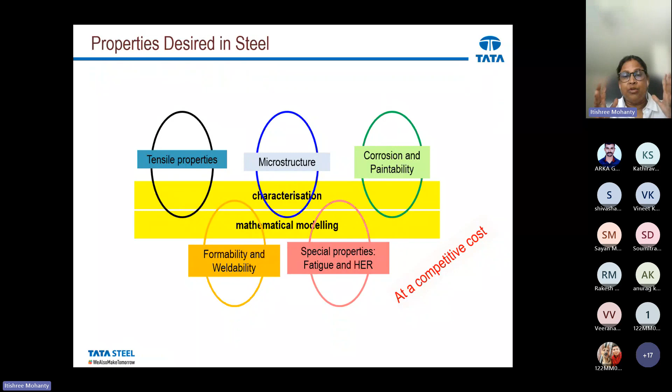And then also the mathematical modeling. Various mathematical modeling tools and equations are available to estimate these properties. How you are going to achieve these properties, we'll see further. I hope most people here will be from a metallurgy or material science background. So the strength prediction, this is a linear equation which comes with some weighted factors of carbon, manganese, nickel, and many other parameters.

It looks very simple, but it is not. Suppose you are working on this, then you go to your supervisor, and your supervisor says no, this cannot be so linear. When you are changing manganese in the presence of carbon, it will impact differently. Then you will add one more factor to it: some weightage of percentage of carbon multiplied by percentage of manganese. Then a few days later, again you think, no, this can be a function of a sine and a tan hyperbolic like this.

So this process will go on because you are not sure what the exact equation is and where you will get properties close to the actual property when you test it. You are just manually updating the coefficients and trying to match it. But this is not the way to do it. And nothing in this world is linear. Even your mind doesn't think linearly.

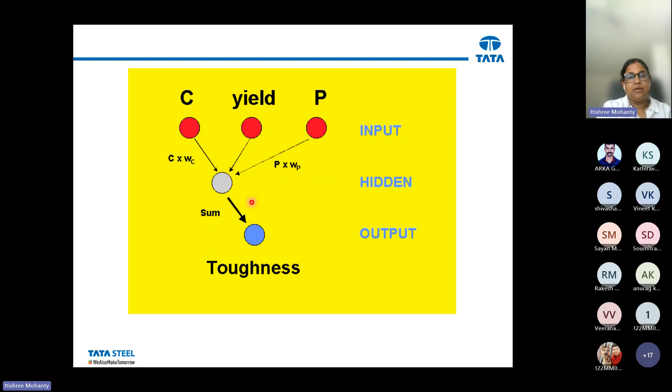captured here. For capturing the nonlinearity, what will you do? You will need to introduce some nonlinear factor to the system. When you are approximating the output from the input, you need to introduce some nonlinear factor. Tan hyperbolic is a very good, very flexible function for capturing the nonlinearity. The way you want it, it can be captured.

If you want to establish the relationship like this, it will also capture it. If you like to establish the relationship in a smooth one, that also it will capture. Suppose you want to add too much complexity to the system, then you can add layers of nonlinearity to the system so that it can capture these. This is how we are going to capture the nonlinearity so that the output can be approximated from the inputs.

If I represent the same thing in a neural network structure, you have the inputs, whatever inputs you have, and you have the output as toughness. Then how are you calculating the output? First, you are multiplying carbon, phosphorus, etc. with some factors. Then you are applying the nonlinearity factor to that.

And here theta is the bias, like the constant in a regression equation. That's how you are estimating the output from the input. Suppose in one layer you are not able to capture the nonlinearity, then you can add a number of layers. That's how a neural network works.

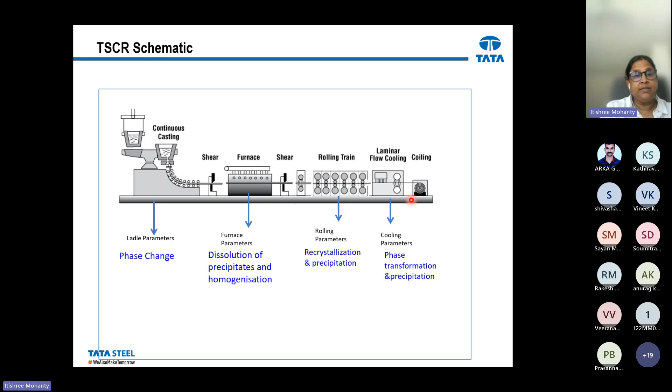How are we going to capture this and use this in predicting mechanical properties? This free energy change, phase change, all these metallurgical phenomena are happening. But when we are collecting data, we need to collect the data which impacts the process metallurgically. Right? Indirectly, how will we capture the phase change?

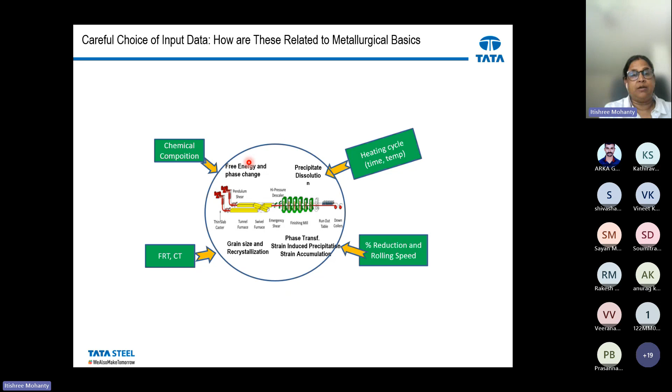We'll collect the data which is an indirect measure of those metallurgical processes, like chemical composition, heating cycle and temperature, the reduction schedule, how much reduction we are giving, the rolling speed, then FRT-CT. These are the indirect measures of the metallurgical changes happening during this process. We are using those parameters and developing an AI-based prediction model which gives us YS, UTS and percentage elongation.

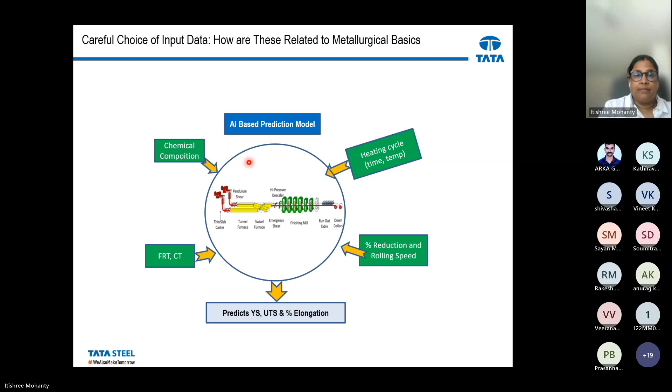How have we developed this? We have collected data which represents, as I explained in the last slide, the coil dimensions, slab dimensions, composition, furnace parameters, rolling parameters, finish rolling temperature, coiling temperature, rolling speed. All those parameters we are considering, which metallurgically contribute to estimating the properties.

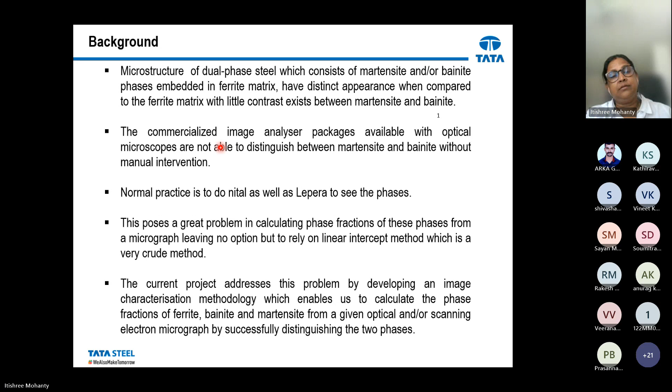So every time, there are problems in preparing the LePera sample. That's why I thought we'd devise a method where, from a nital etched image, we'll be able to predict what the phases are and their percentages. How are we going to do this?

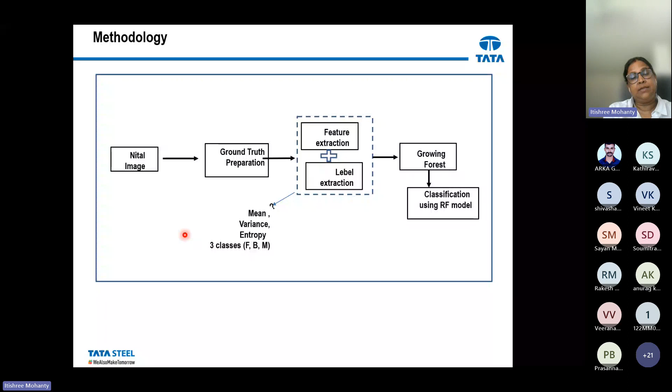How is it working? As I told, we prepare the nital image, then we do the ground truth preparation. For ground truth preparation, we label each island of ferrite, martensite, and bainite. It is a random forest classification based algorithm where we take the mean, variance, and entropy of the pixels and classify them.

What problem did we face here? As I showed in the previous microstructures, there are ferrite, martensite, and bainite. In many cases, ferrite regions were wrongly classified as bainite and martensite. Then bainite and martensite phase fractions increased and ferrite phase fractions decreased. Then we thought, what is happening? After a lot of testing, we realized ferrite grain boundaries were being considered as martensite and bainite. They were being included there.

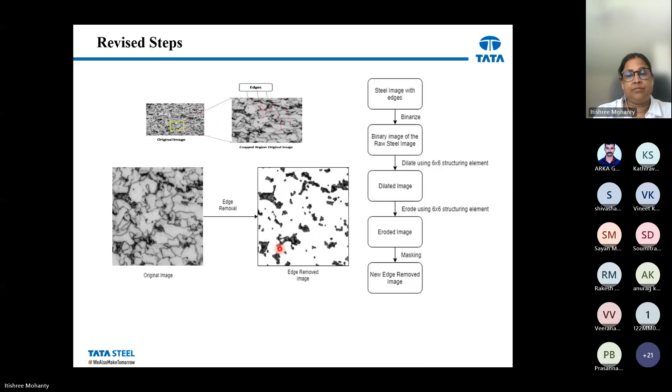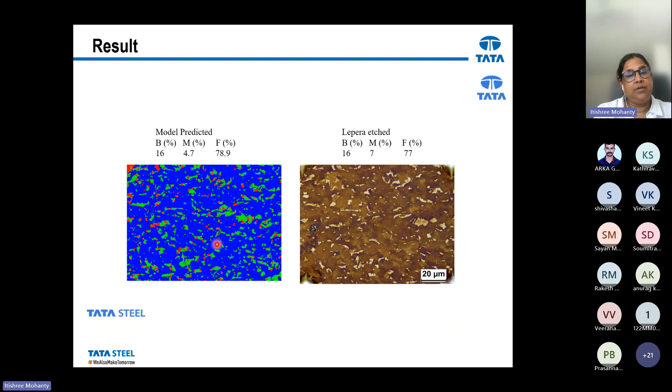Next, come to AI in alloy design: how we are using artificial intelligence in designing alloys or new product development. What are the stages involved in new product development? Initially, before developing, you do some research on what product you are targeting. Then you do the thermodynamics study, chemistry, kinetics, what you are going to produce, what your target properties are. Then after the initial study, you finalize the composition.

This much composition will be there, and a range of process parameters will be this much, and you do some laboratory simulator trial and error, like Gleeble and other things. Then after producing the material in the laboratory, through XRD and tensile testing, we see what the structure and property are. It will not happen in one iteration. You have to do a number of iterations, and then you go for production.

Suppose you have finalized one composition; in production it may not be exact. You will have tolerance in composition, and also in process parameters. Only then will you be able to produce the material. Then you will evaluate the quality to see whether your target properties are achieved or not for the new product development. This is a time-consuming process.

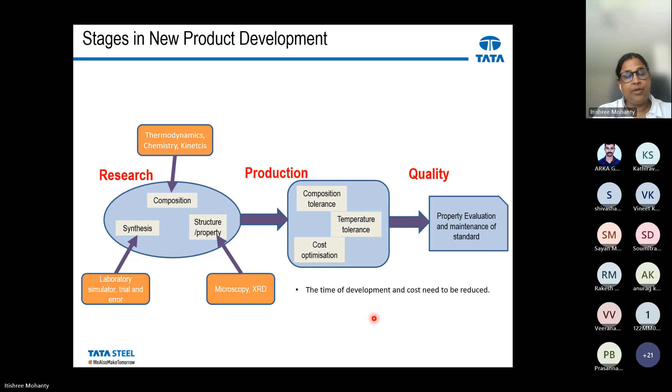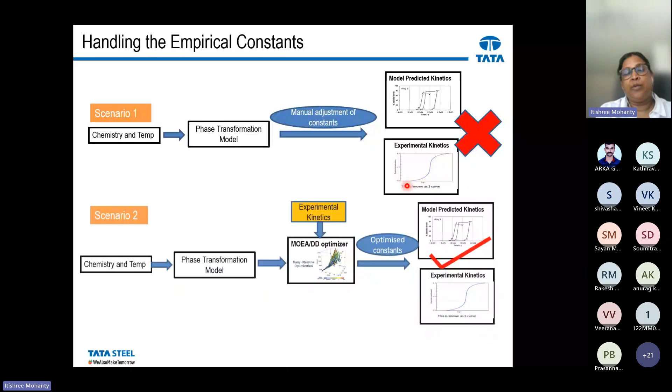Take scenario one: you have the chemistry and temperature. You used some mathematical phase transformation model and manually adjusted the constants, then you developed the model and tried to validate the model-predicted kinetics against experimental kinetics, but it didn't match because you are just linearly or manually adjusting the constants. So many things interact here, and there are dynamics too.

You are thinking, oh, I am adding carbon, then I am putting manganese, but you are not thinking of all the parameters. There are a huge number of parameters, and you are not thinking how they all impact simultaneously. There is no equation which will consider your carbon, manganese, your FRT, your CT, your thickness reduction, your furnace temperature, your cooling pattern. There is not a single equation describing how all the parameters behave simultaneously.

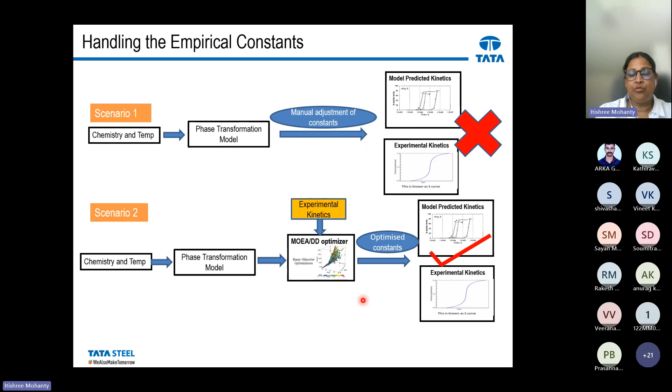How can you do this? When you have the chemistry and temperature, your phase transformation model, your experimental kinetics, all the data and knowledge, you put it in an AI and an optimizer, then you get optimized constants, optimized solutions. Then your model-predicted kinetics will match your experimental kinetics. That's how we are going to develop the new product, and we are developing this.

As I told in the first case, you can take composition 1, 2, 3, 4, do the synthesis, and calculate the structure and property. This takes a lot of time. What is the problem here? First-principle based models are domain specific and it is difficult to correlate the chain of development. When we design a chemistry for a new product, it is totally based on our experience, available data and available literature.

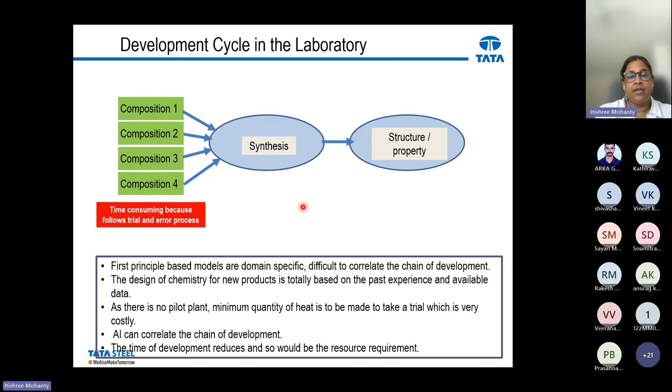When we are developing the product in a plant, we don't have any pilot plant, so we cannot make a small heat and test it. The minimum quantity of a heat to be made for a trial is also very costly. That's why we are using AI, which can correlate the chain of development. Development time will be reduced, and we will be able to achieve our target property by optimizing our process parameters and composition. Those are the steps we are doing here.

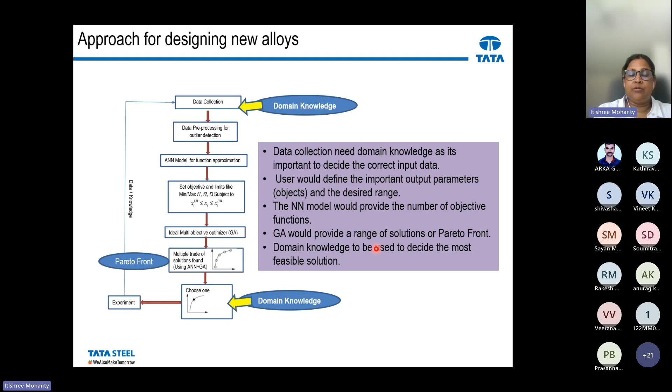First, we collect the data based on our domain knowledge. Then pre-processing, and we develop a model for function approximation. Then we use a genetic algorithm, multi-objective optimization, to find combinations of parameters to get the output property. We call this a Pareto front. Then we choose one of these solutions, also based on our domain knowledge, and do an experiment to validate it. That's how the new product development cycle is done.

Whatever solution needs to be selected and trialed depends on your mill constraints, your available resources, and also cost. Based on all those factors, which you know better, you will pick a solution and take a trial on it. That's how alloy design happens using AI.

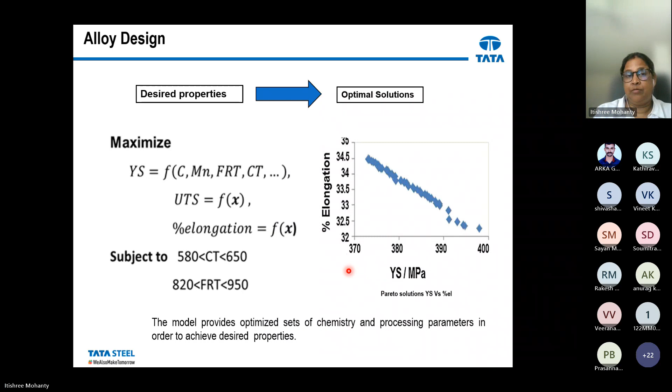Now, AI in optimization. In the previous slide, what I showed, it is not always the case that you need to optimize only two properties. What is optimization? Optimization means you are trying to find a minimum or maximum value of one or more objectives, with whatever constraints you have.

There are two different goals in multi-objective optimization. You need to find solutions as close as possible to the Pareto front, as I showed, and also solutions that are as diverse as possible. You cannot always search only the high strength area or the high ductility area. The solutions should be diverse enough to spread across the solution space.

And you may need to optimize more than 3 or 4 properties if necessary, which are conflicting in nature. That is also a challenge in optimization. Then it becomes a many-objective optimization problem. With an increasing number of objectives, almost all solutions start becoming non-dominated.